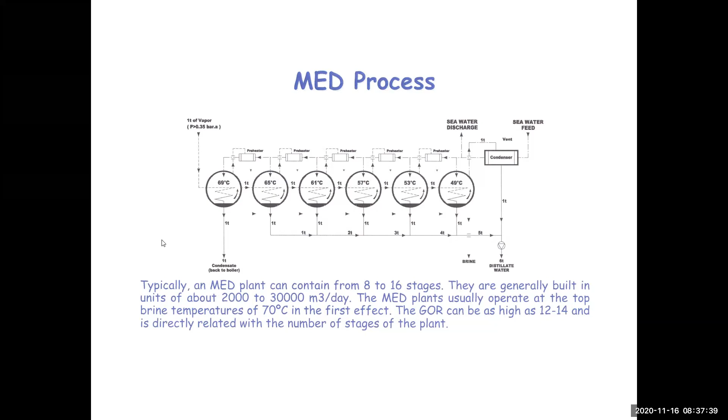In some of our visits to desalination plants, we were first introduced to a place in Spain called Almeria.

In Almeria, they have a desalination facility that is operated by solar energy. They have so many systems to operate by solar energy. Some of them, like what you see here, have a field of solar collectors. The solar collectors are basically heating oil, which is heated to a high temperature of about 400 degrees centigrade, and this oil is being stored.

The oil then passes through heat exchangers versus water. Water is converted into steam, and the steam operates steam turbines. So it's running basically on a Rankine cycle.

Steam at the low pressure turbine is extracted at a temperature of about 70 degrees to operate an MED unit, which is arranged vertically, with the effects placed on top of each other as you can see here, and it operates to produce water. So you have a system operated by solar energy that produces power through the generator, and steam is taken to operate a desalination system.

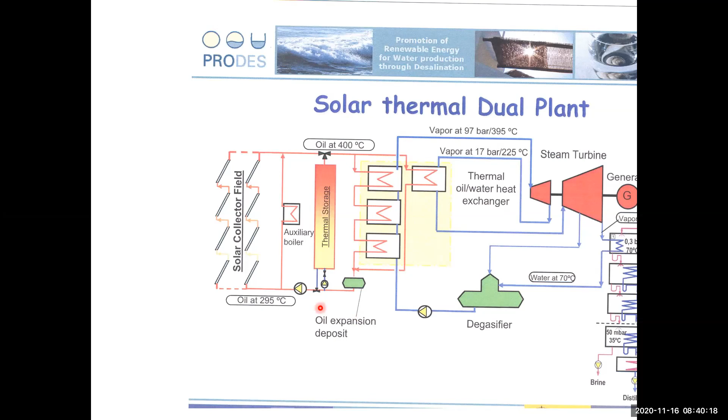What we need to do with these MED systems in our course is evaluate the performance with or without vapor compression. We have seen the vapor compression to be either thermal vapor compression, using a thermal vapor compressor or ejector, or a mechanical vapor compressor.

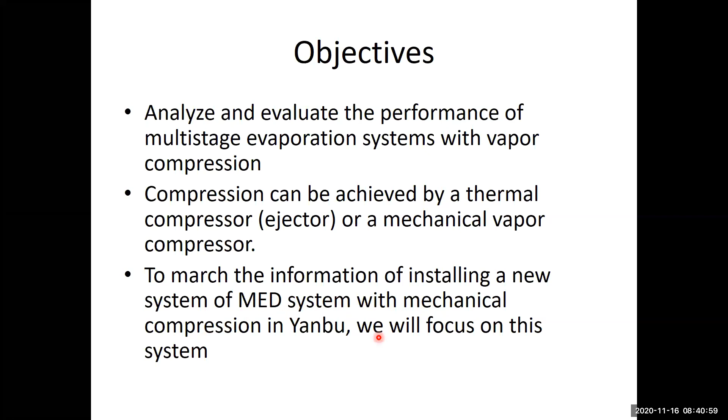There are actually new MED desalination systems operating not only with mechanical compression, but the problem with mechanical compression is that you have vapor leaving in the last effect. We can see it here in the figure. The last effect vapor is taken out here, and all the vapor is routed into a mechanical vapor compressor.

The compressor compresses the vapor from the last effect pressure to a little more than the first effect pressure, so that the superheated vapor enters the tubes and heats the seawater, which is distributed here. What arrangement?

The seawater comes in and is distributed in two heat exchangers: a brine feed heat exchanger preheater and a distillate preheater. The seawater is distributed in both to be heated from the cooling water temperature to TF. Then the feed is taken out of these units and distributed in parallel.

Steam comes in and heats the seawater to saturation temperature, and part of it evaporates. The vapor is taken out and used as a source of heat in the next effect, where it condenses, heating further. The process continues until the last effect, where the vapor leaving is taken entirely as input to the mechanical compressor.

The mechanical compressor can be connected to a diesel engine, or it can just be connected to an electric motor that can be operated by a photovoltaic system.

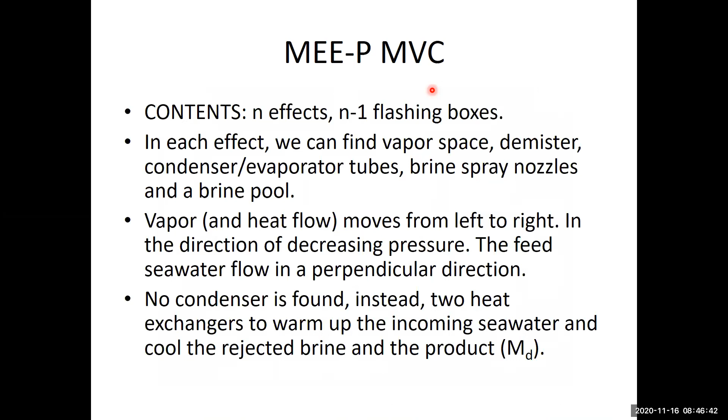The vapor moves from left to right in our case, because an additional amount of vapor goes to the second effect, condenses, and meanwhile generates vapor that goes to the third effect. So vapor is moving from effect 1 to 2 to 3 to 4.

So we're talking about a parallel flow system, with horizontal flow of the vapor from left to right, and vertical flow of the seawater which is being sprayed after being distributed equally between the effects.

In this unit, the vapor leaving the last effect goes to the compressor right away. But what we do is preheat the seawater using the brine which is being rejected, since it's at relatively high temperature. We make use of it for preheating the seawater. The distillate we collect is also used for preheating.

This is a description of the process, which I just mentioned a while ago and has been repeated since we talked about that earlier.

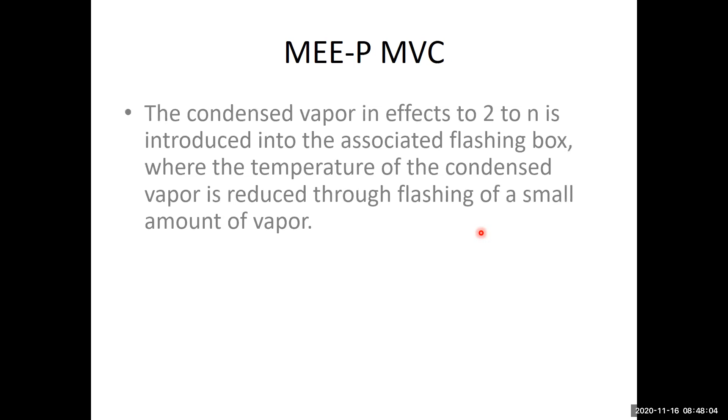And flashing would be there. The system that I showed a while ago has flash boxes. You can see it here, so that the distillate that condenses inside the tubes goes into a flash box. The flash box is normally connected to, or at the same pressure condition as, the effect it's connected to.

Here we have compressed superheated vapor. The vapor comes in, it will desuperheat and then condense at a constant pressure, which is the pressure of the steam coming here. This is higher than the pressure of effect number one.

So when you get that liquid distillate to a flash box of lower pressure, some flashing will occur. You take the flashed-off vapor in addition to the vapor coming by boiling from the effect, and both of these become the source of heat for the next effect, and the process repeats.

The difference here compared to previous installations of MED systems is that the number of flash boxes is equal to the number of effects. For this system, the first effect has a flash box, whereas in the previous ones we did not have a flash box with the first effect.

Why? Because in the previous installations, we had vapor coming from a power plant, so it's not our vapor, it's not our product—you condense it and return it to the power plant. But here, the vapor we use as a source of heat is basically our product, coming from the last effect.

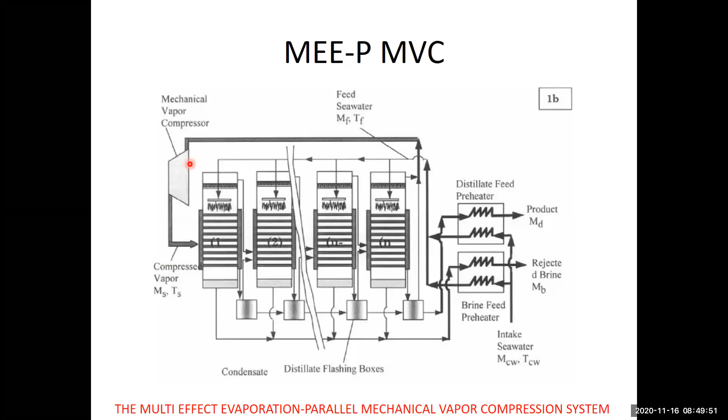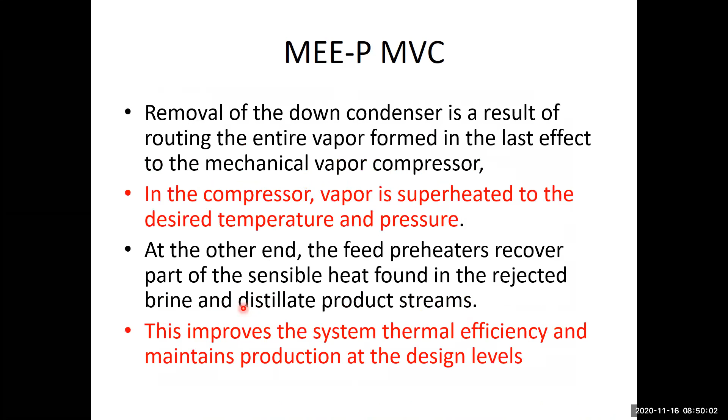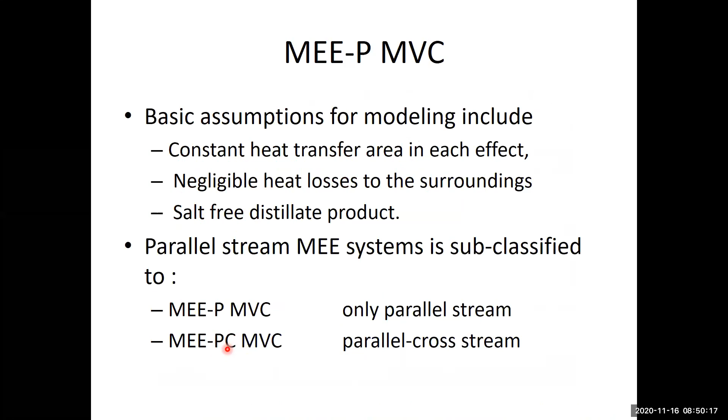So we talked about the process already, which is summarized in this slide, and a modification to the system is done through having not a parallel effect, but a parallel cross effect. In the parallel cross arrangement, the flow leaving the bottom of one effect enters the bottom of the next effect at a lower pressure, so it adds additional quantity of flashing—you take that flashing as an added vapor which contributes to productivity.

Khalid, you have a question? Go ahead, please. Yes, good morning, Doctor. Can you hear me? Yeah.

Yes, I can hear you. So the distillate that comes out from the flash boxes, can we just take it out as a distillate instead of preheating it, or make it a source of heating for the second effect?

In the one coming by flashing, yes you can. But why are we taking it to the next effect? Because it's still vapor, and the vapor needs to condense. So to condense it, let's make use of the latent heat of condensation. This is the benefit you are having here.

Instead of having a source of heat which is just the boiled off vapor in the previous effect and the flashed off vapor at the bottom of the effect coming from the brine of the previous effect, you add whatever you're getting from the flash box as well. So the total quantity of vapor condensing inside the tubes, the condensation input heat, is the total mass flow rates into HFG. This produces a little more heat that helps preheat the water and generate additional distillate vapor.

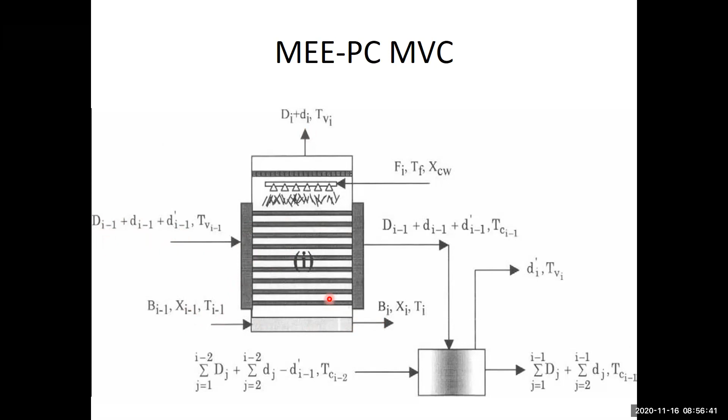And that's basically what's been shown here. We have feed coming in, we have brine from the previous effect coming in, and then we have a quantity of distillate, which is a combination of the formed vapor and the flashed vapor, and the brine that is rejected from this effect. The distillate is free of salt, so the salt balance is written here based on this equation.

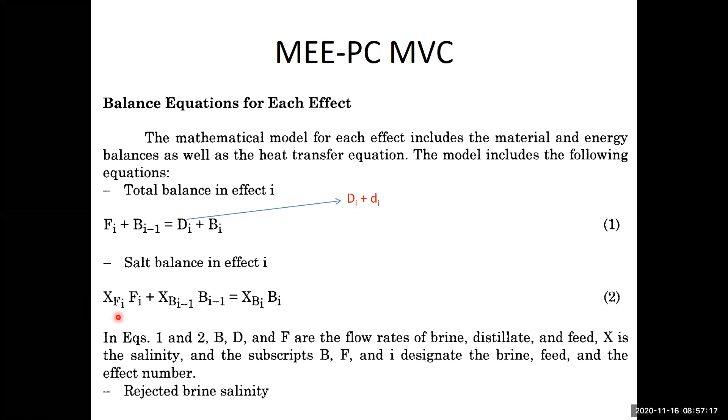Rejected brine salinity can be written as well as a function of the temperature. This has been given by El-Dessouky in his book. You can find this equation in the appendix. The book, which is there on the blackboard by El-Dessouky and Ettouney, they came up with this approximate way to obtain it by the mass balance.

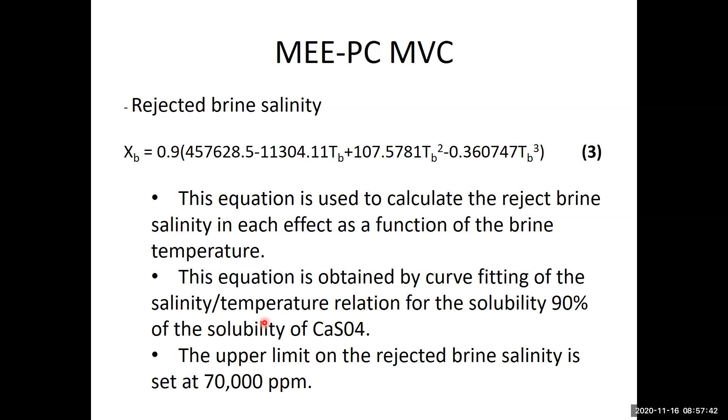And for the parallel arrangement, we have seen this slide before, and we've talked about how the balance can be done. We are just looking here at slightly more detail: this is the energy input to the unit, which is basically this quantity entering as saturated vapor, leaving as saturated liquid. So this mass multiplied by the energy, the HFG, is lambda here, the vapor that comes to condense here.

This is going to heat the feed from TF to TI, and part is going to evaporate here. Actually, in this specific part, it's not only that part that will evaporate, but there is an additional quantity here which is missing in that expression, and this quantity should be the flashed off vapor which is coming from the bottom of the effect.

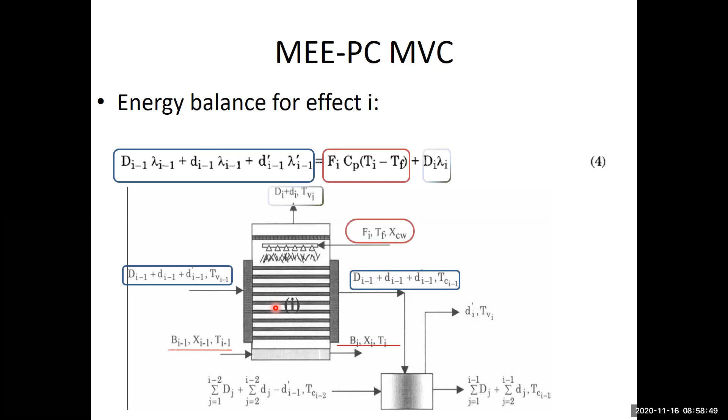That's just again a comment on the equation. The temperature of the vapor is less than the temperature of the effect by the boiling point elevation. As a matter of fact, if you need to be very accurate, as we are moving from one effect to the other, it's not only the boiling point elevation that makes a difference. Upon condensation, there is delta P, there is delta T due to pressure loss, there is delta T due to the transmission line, and there is delta T due to the loss of pressure while condensing.

So the pressure loss could be in the demister or in the pipelines, and these are small to consider. But if you need to go for very accurate work, the amount of vapor that comes inside the flash box can be given by that expression. We have seen this expression last time, and normally the temperature leaving the flash box can be given as the temperature of the flash box or the effect plus the non-equilibrium allowance expression.

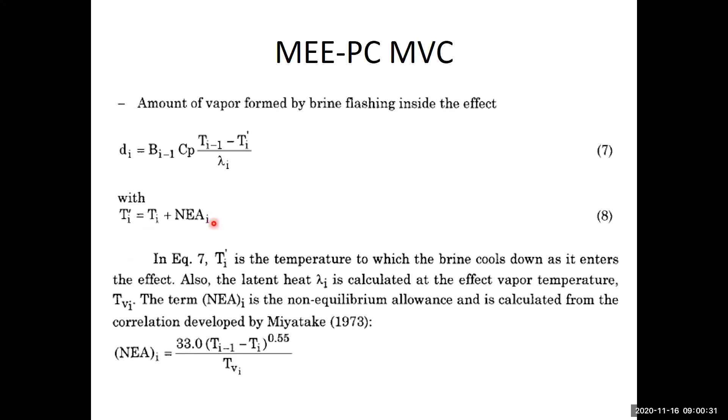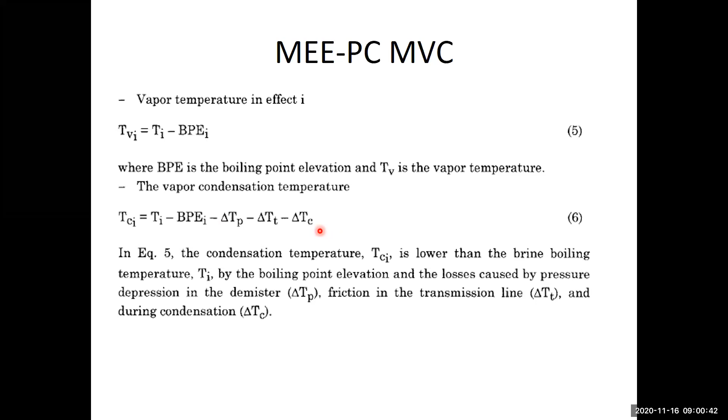In our simplified analysis, we just consider the losses to be the boiling point elevation and the delta T between any effect and the other one. But sometimes in a problem, you have something which is called thermodynamic losses. The thermodynamic losses basically take care of the non-equilibrium allowances and this kind of delta T that we have due to the transmission lines, due to the demister, and due to the condensation.

In terms of areas, we calculate the area and distribute it into two parts. One is due to the sensible heating. We took an example of this and calculated the area due to sensible heating to be small, but if you have a larger temperature difference, then this sensible part cannot be neglected. The latent part will always remain the bigger, but sometimes this value can exceed 10%, and in that case you would not want to neglect it.

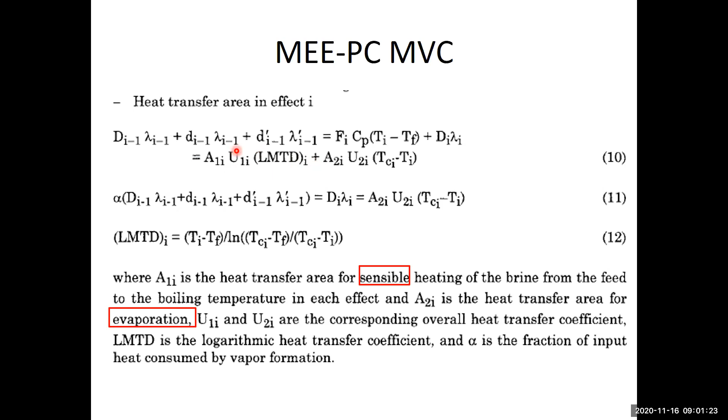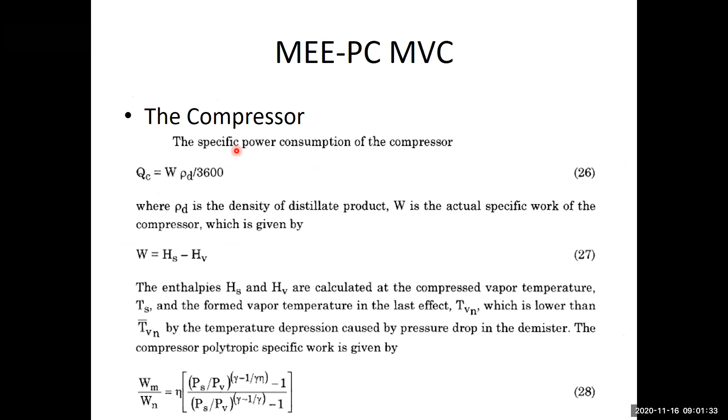We talked about this before, how to calculate the log mean temperature difference for every effect, and the equations for the compressor power are given here. After that, gamma can be calculated either as Cp over Cv, as you have seen earlier, or El-Dessouky came up with an empirical formula to calculate the value of gamma. I personally prefer that we go for the vapor and see what is the value of Cp, what's the value of gamma.

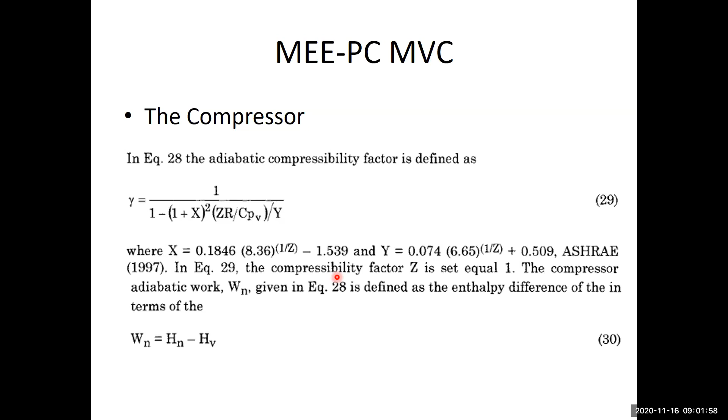The preheaters again, we have the seawater being divided, not equally, between the two preheaters. A portion of it is going to go for the distillate preheater, the other one is going to go for the brine preheater, and then they are going to make an energy balance for the whole unit as a whole.

Then this is your equation here: QH equals M feed times Cp times TF minus T cooling water. But we know that part of that MF has been heated in the distillate preheater and the rest has been heated in the brine preheater. This is some sort of an overall energy balance for the two heaters together.

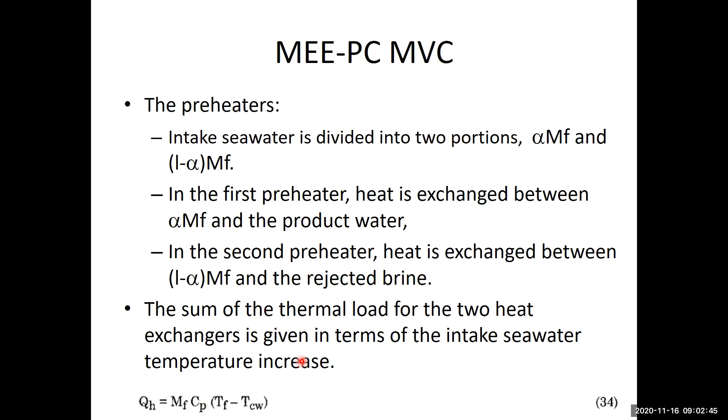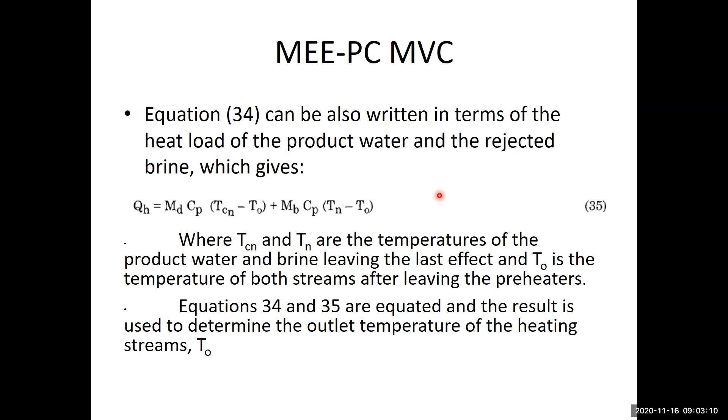And this is the details. Part of it is in the distillate preheater, part in the brine preheater, and then both the distillate and the brine are leaving both heat exchangers at a constant temperature T naught, which is basically an assumption, because in reality it is not necessarily the same value, but we do that for the simplicity of our calculations.

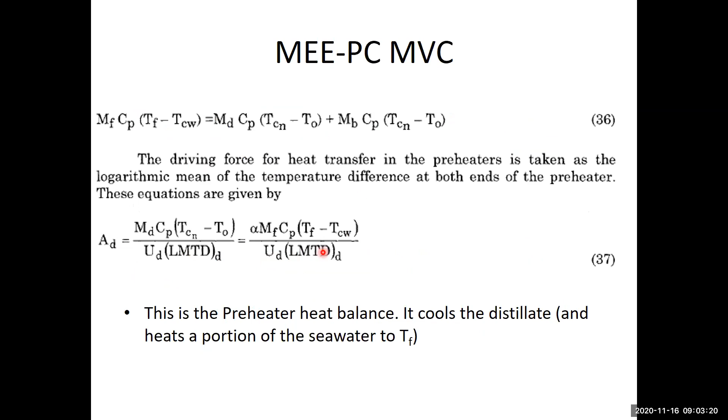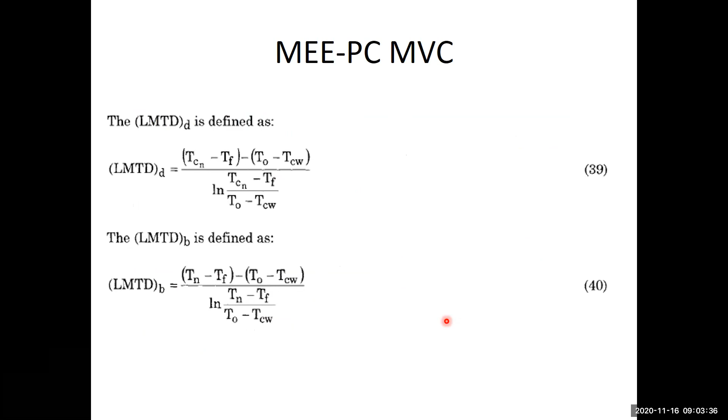And this is basically the area of the distillate preheater. Similarly, a similar equation is written for how to calculate the area for the brine preheater, which is given here, and the log mean temperature difference for each one of them is expressed here. That's something we have done before, so I'm going fairly quickly across these slides.

Now there is some sort of, let's call it, a little exercise that I want to go through. The exercise here is basically considering a layout of a multi-effect distillation unit.

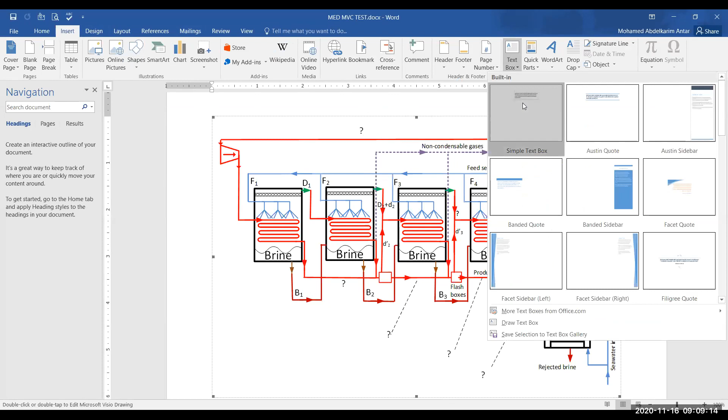Yes, for example, that quantity on the top is going to replace this question mark. I'm talking about vapor leaving at effect number 4, so it should be D4 plus whatever has flashed off here, which is small d4, plus there is a certain quantity coming from the flash box here, which is d'4. So this question mark is going to be replaced by this quantity in front of us.

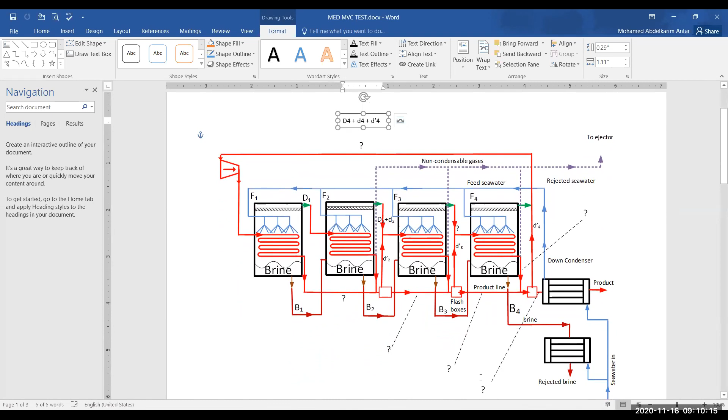Now I want you to think of the rest of the question marks and what they represent. How many question marks do we have here? There is 1, 2, 3, 4, 5, 6. Think of that and try to estimate what quantities should be placed corresponding to each one of these flash boxes.

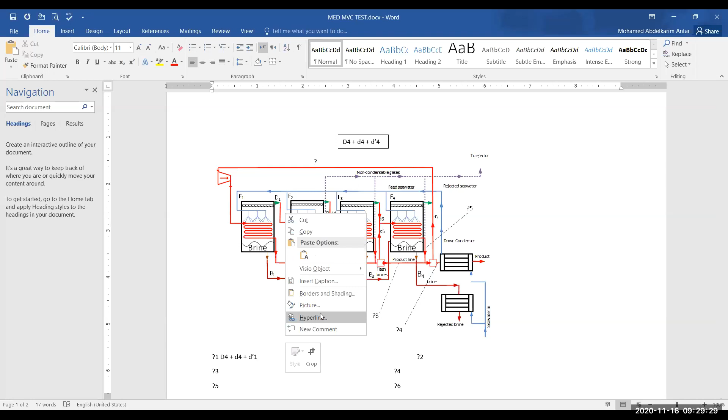Now let me use this. It does not have this flash box here because it's a Word file, so anyway - basically this quantity that we have here is the one that enters into the compressor. It is the one that has been compressed. It is the one which is being condensed here, and it is the same quantity which is reaching here. So at stage number one, the quantity here is the same as quantity right here, which is D4 that has been formed by evaporation, small d4 by flashing, and d'4 in the flash box. This is the quantity going through the compressor, and this is the quantity that condensed and reached here.

What about 2? What has happened from this point to that point? At number 2, what do you think is there? Let me, Khalid, you're raising your hand. You're raising your hand. Doctor. Yeah. Can you hear me? Let me start in order. Khalid.

One question here regarding what comes out from the flashing - from where exactly is it taken out? For example, if you look at the first effect, D-2, this is taken out from what exactly? This is coming from the flash box that we have here, which is the flash box associated with effect number 2. Actually, this is coming because this D1 is leaving at the pressure P1.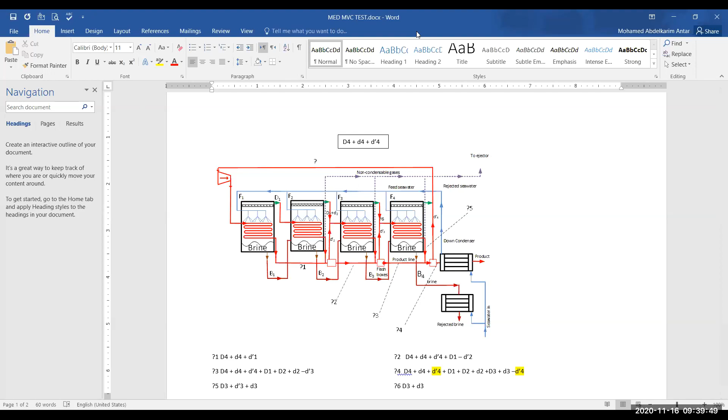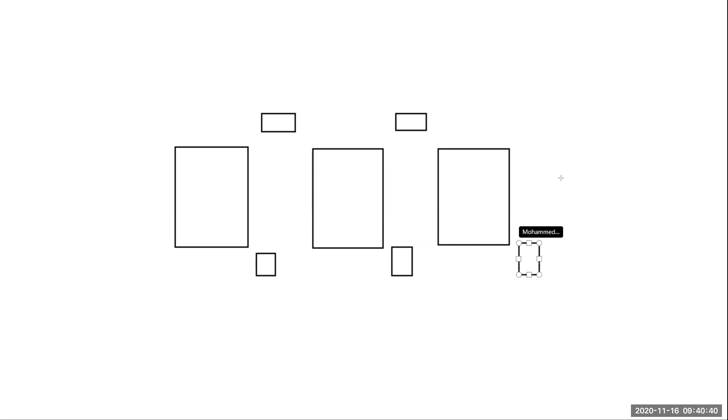What I may look at now is a modification that I would prefer to do in a system like this. We're talking about an MED system. In that MED system, basically you had effects. In these effects, we have preheaters to preheat the feed, and we have flash boxes that make use of the liquid leaving one effect as a vapor, which goes to the second effect. And we have a down condenser. So this is the combination we have for a multi-effect desalination system. Now let's do something.

What if we move these flashing boxes inside? I forgot to mention that we have vapor condensing here, vapor condensing here, and vapor also condensing here. Isn't it what's happening? And then this is coming back as a product, which is then collected.

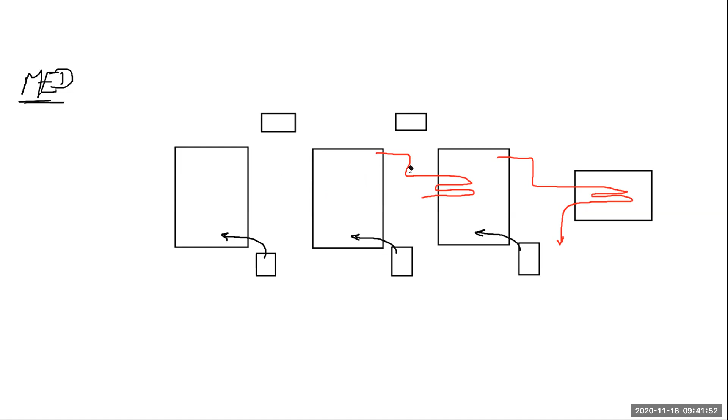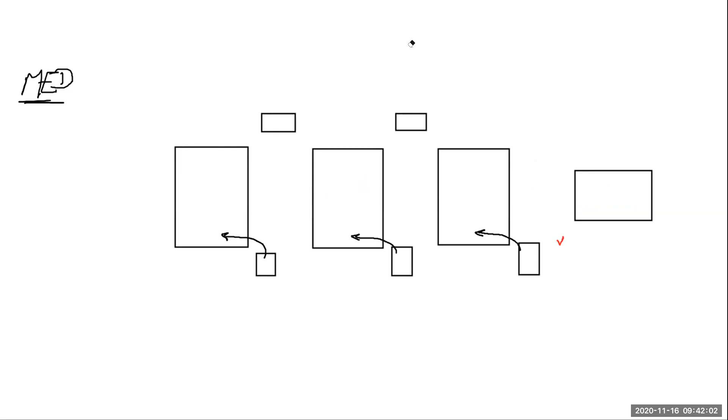So what I'm going to do is: number one, we're going to move the flash boxes inside the effects. Number two, we are going to eliminate all of these heaters and move these preheaters inside the effect. If I have a preheater here, I would move it inside the effect.

What I did looks like a special case or type of MED system, but the question is where the actual heating is going to occur. I'm talking about seawater leaving the condenser, which will enter and be preheated in a tube bundle, which is basically this one. Then it will be preheated in another tube bundle, which was this one. And then it will be heated in a tube bundle. What about the steam coming from a power plant?

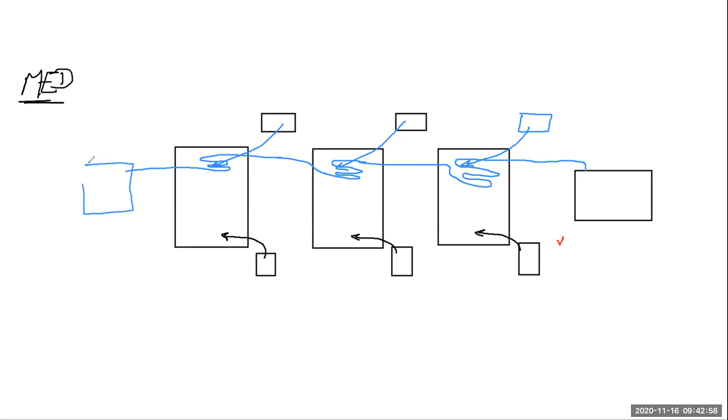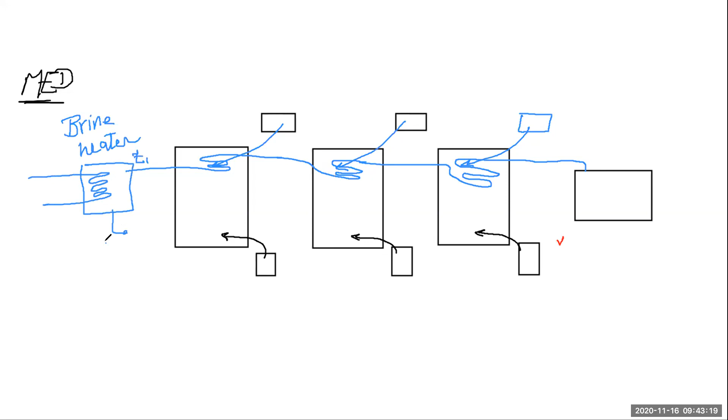I'm going to make a special heat exchanger here, which we are going to call a brine heater. In the brine heater, we are going to heat by steam from T1 to capital T naught, which basically is our T maximum. And this is going to enter here at a higher pressure and temperature. The flash box is already there.

So what will happen here? Flashing. Some vapor will go up, and this vapor is going to condense on the outer surface of these tubes. So I'm going to put a tray here to collect the condensate. Whatever vapor goes up will condense here, and by condensing, it will preheat the feed, and then be collected as sweet water.

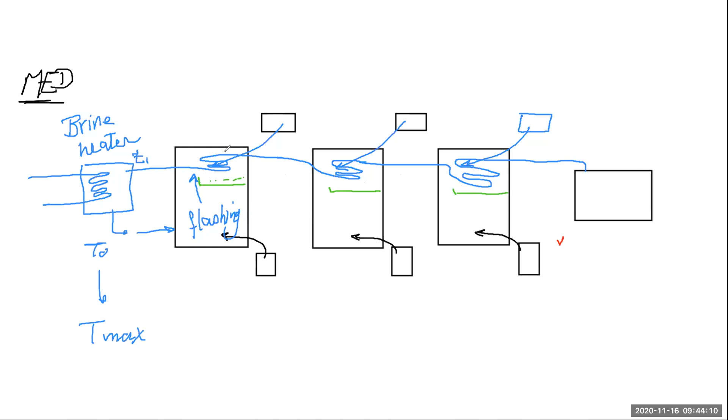So we have some sweet water collected here, and we have preheated the feed. Then the part that will not flash will leave this and enter the next effect, which is at a lower pressure and temperature, so it will flash again. Some vapor will rise, and that vapor will preheat the feed and then condense here, where you can collect the condensate.

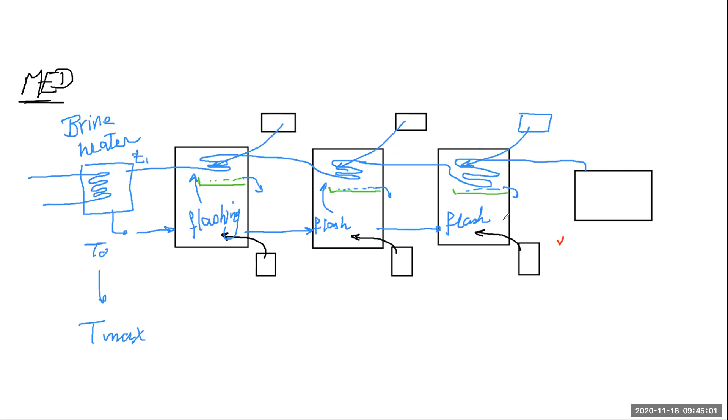And the vapor that will leave here is going to flash here, at a lower pressure and temperature. The vapor that comes up will condense here, and you're collecting it here. What you have here is flashed off vapor entering the condenser. In the condenser, it is going to preheat the feed flowing here. So this is m dot feed plus m dot cooling water.

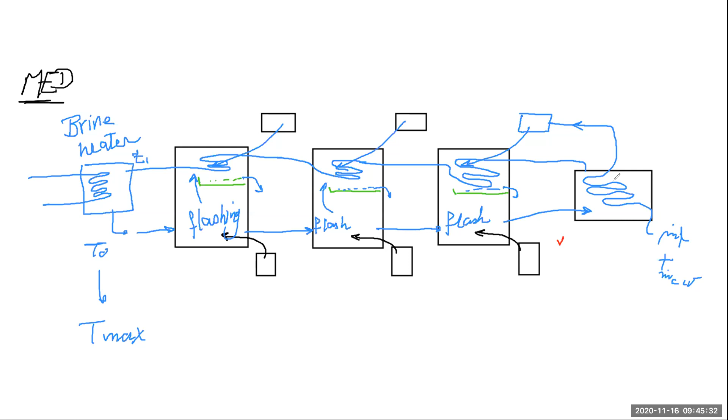So it's a rough sketch. By this rough sketch, I wanted you to look at the MED as the original kind of layout. Out of the MED, we came up with a modification, and this modification that you have just seen is nothing but the multi-stage flash desalination system, which is the last mode of conventional thermal desalination that we are covering.

That mode of desalination started in 1957 with the first MSF plant built in Kuwait by an American company, Westinghouse. The unit began operating, and MSF so far is the largest contributor to desalinated water in the Gulf area.

Saudi Arabia, Kuwait, Bahrain, Emirates, Oman—all of them get the majority of their water from MSF systems. What's good about MSF? We don't have bundles of tubes inside for heating, only the preheaters. In the preheater, seawater coming in at seawater temperature is heated to the feed temperature, and as we move from one effect to the other, the feed temperature increases until we reach the highest feed temperature, where we enter a heat exchanger, normally a shell and tube heat exchanger.

We heat it to the top brine temperature, so heating occurs in one unit, and then flashing occurs repeatedly. The very hot seawater does not pass through tubes anymore; it is just flashed in the pool of every one of these stages. Those units being heated can go from about 40 degrees centigrade up to about 70 to 90 degrees.